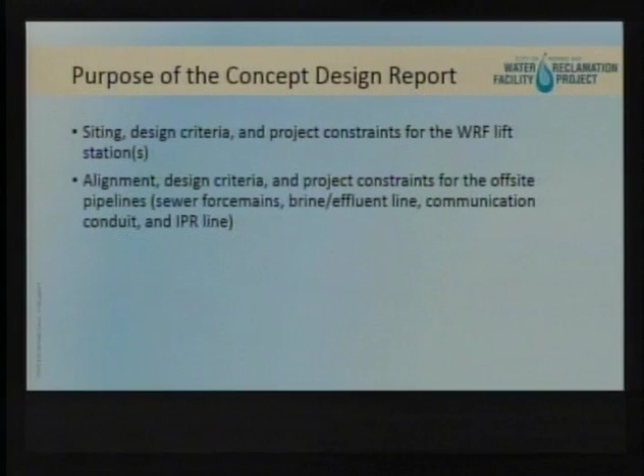We first brought the information in this concept design report to WRF-CAC on December 17th of last year. We then brought a very similar presentation to council in January. We were directed to come back to council in February to revisit the item, mainly so that council could take formal action on the selection of two critical items: the alignment and the configuration or number of pump stations. I'll go through that a little more here as we review the concept design report information.

Again, on January 22nd of this year we brought it to council. We were directed to come back to council again on February 13th. And now we're here at WRF-CAC, and this is June 4th. The plan is to bring this to council next week—a very similar presentation, overview again, and just formal receipt of the report. The final concept design report will be delivered in September 2019. The reason for that delay is essentially that the design engineer is planning to deliver the final of this report along with their 60% design submittal expected in September of this year.

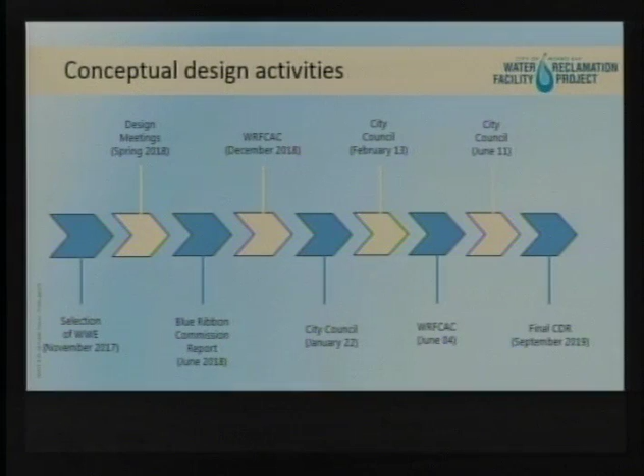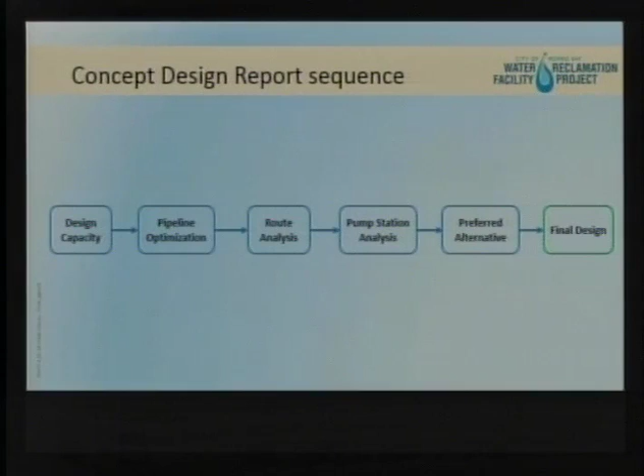On the design capacity, the design engineer looked at a number of sources of information to come up with the design flows for the pump stations and pipelines—really three main sources of data. There was facility master plan information from 2017. There's historical flow meter data, which the city has collected for a number of years. And then the One Water Plan, which included a detailed flow analysis performed by Villalobos and Associates back in 2016-2017 to inform the One Water Plan, and specifically the collection system master plan component of that project.

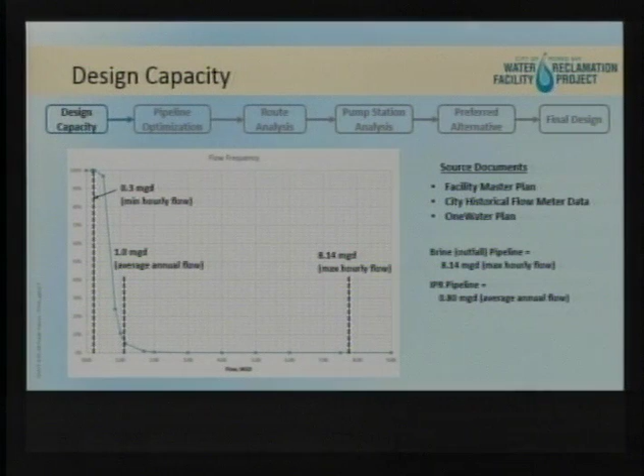The result was a determination that the Brine or Outfall pipeline should be sized for the max hourly flow capacity for the treatment plant, which is 8.14 MGD, and the IPR pipeline would be designed for 0.8 MGD. The main treatment plant itself would be designed for an annual average flow of 1 MGD. The way we got to that 0.8 MGD is you take the 1 MGD treated on average by the water reclamation facility, and once you pass that water through the reverse osmosis process at an 80% recovery rate, you take 80% of that 1 MGD—that's the water we have available to put into the ground, which is 0.8 MGD.

Then we looked at pipeline optimization. This was something considered during the preparation of the Blue Ribbon Commission report, and was also discussed at length in December, January, and February.

Previously there was the alternative of using 2 separate sewer force mains. Because of the nature of the flows the city's treatment plant will see, they range from hundreds of thousands of gallons per day during low dry weather flows, all the way up to 8.1 MGD anticipated for wet weather flows. So the proposal was to use 2 separate force mains, one smaller, one larger. The small one would be used during average dry weather conditions, and the larger one would be used during wet weather conditions in conjunction with the smaller, also giving the system some redundancy.

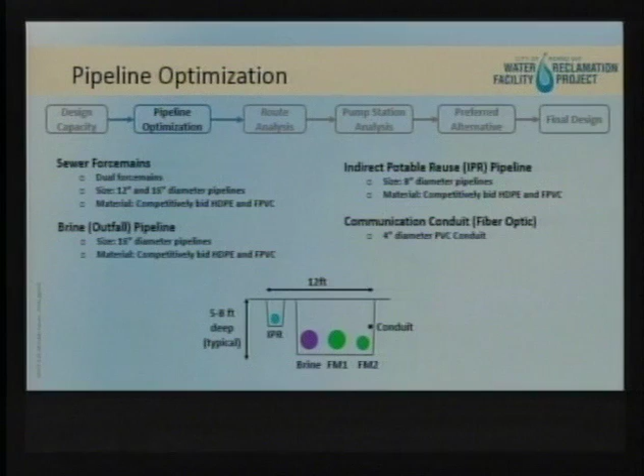The Brine Outfall pipeline was sized at 16-inch diameter, looking at a number of different materials. The IPR pipeline is envisioned to be an 8-inch diameter. We also looked at a communication conduit to provide fiber along the pipeline alignment to connect the different pump stations, that's a 4-inch diameter conduit.

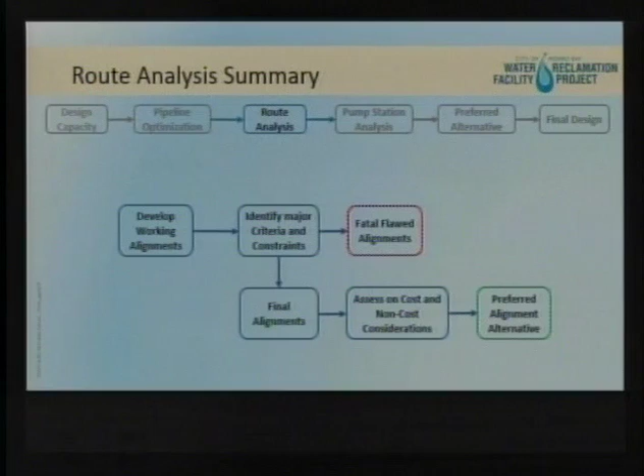A route analysis was performed. First, a number of different working alignments were identified. Then we went through the process of identifying the criteria by which those alignments would be evaluated, as well as some of the major constraints. Then we went through a fatal flaw analysis to figure out which of these alignments just wouldn't work, regardless of cost or other reasons—they were deemed non-viable. The ones deemed viable made the list of final alignments. Those were assessed using cost and non-cost factors, and we came up with the preferred alignment alternative.

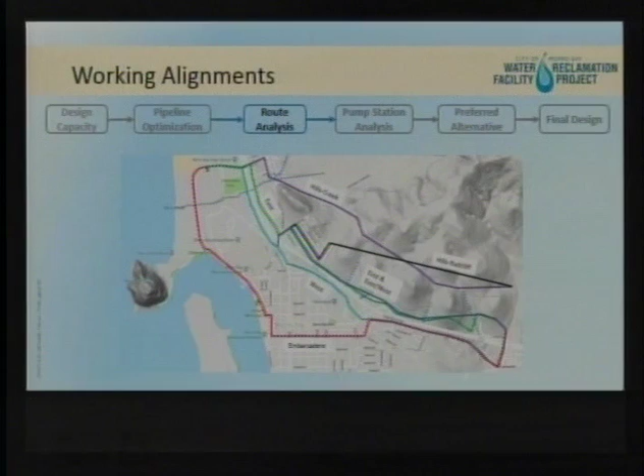This figure shows the 5 different alignments that were considered. There are 3 on the east of Highway 1, as well as 2 different alignments to the west of Highway 1, with the 2 west alignments being the ones that were not fatally flawed and went through detailed analysis—the Embarcadero alignment and what we deemed the west alignment, the one that runs in Main Street, the bike path, and Quintana.

Pump station analysis was performed. Originally we envisioned the system would operate with a single large pump station located near the city's existing corporation yard. Based on a review of flows and additional analysis, the dual pump station concept was identified. It had a lower capital cost than the single large pump station, and had other ancillary benefits, including the ability for the city to reuse existing infrastructure. So the determination was made to move forward with the dual pump station option.

As mentioned previously, the city is currently putting together an addendum to their final EIR. That final EIR addendum includes this pump station B, located near the intersection of Highway 1 and Main Street.

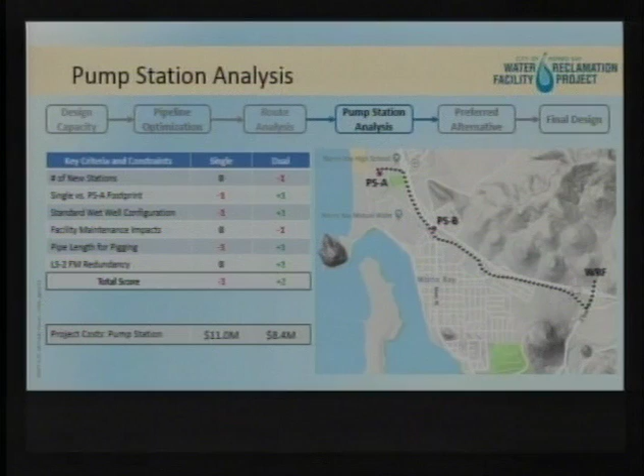This figure shows the preferred alignment with the 2 pump stations identified and the alignment as it currently exists. There are a couple of small changes in the alignment—the pipelines are no longer running through Lila Keiser Park based on input received from some concerned Native American groups.

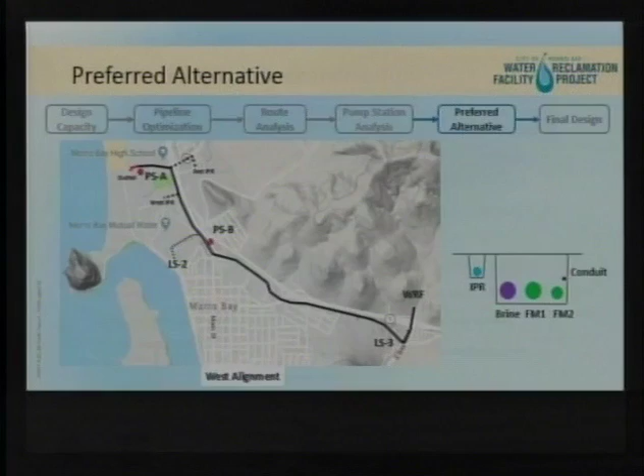One thing noted in the staff report that I want to highlight briefly is that this report was initially drafted in November 2018. We're now in May 2019, presenting the final draft. Very few changes have been made to that document. The one critical item to point out, which we've noted in the last several monthly status reports for the project, is that the schedule for this component of the program has been impacted by the city's ability to access a couple of properties critical to designing the pipeline, mainly as we move from 30% to 60% design.

A really important component of that is getting the survey completed, as well as the geotechnical investigations completed, and getting that information to inform the design. We've had some challenges accessing the PG&E and Vistra properties that we've now worked through. The surveying for both of those properties was completed last week.

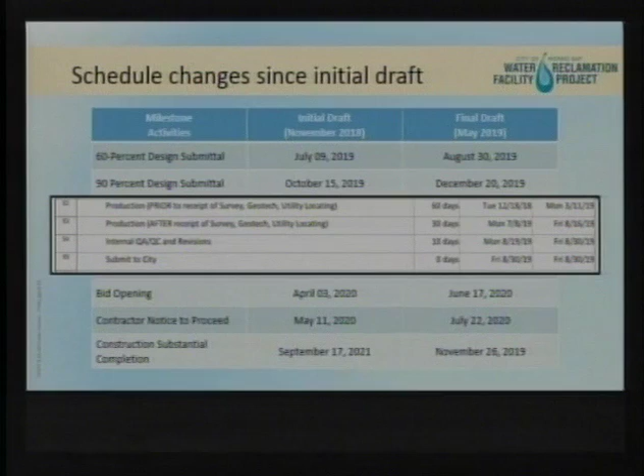We're currently working to get the geotechnical work done in June so that the project can progress. But this table identifies the slippage in the schedule by several months, kind of all the way down the line, and that's really being triggered by the 60% design submittal being pushed out several months.

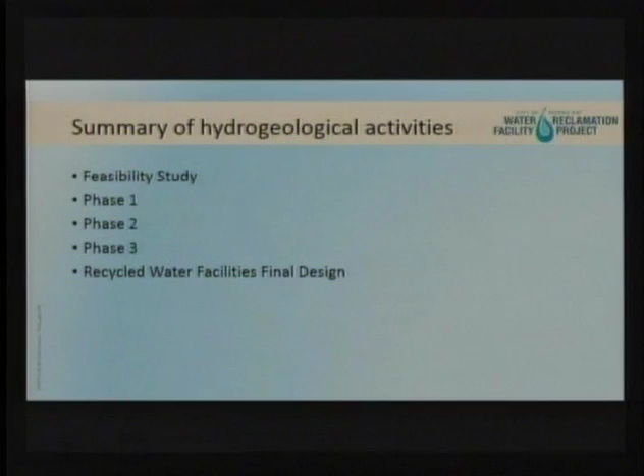So the feasibility study made a number of findings. One, that it's feasible for the aquifer to accept injection. Number 2, a minimum of 4 injection wells will be needed to inject the quantity of water we're looking at. We're looking at a range of capacity of that basin to accept the water.

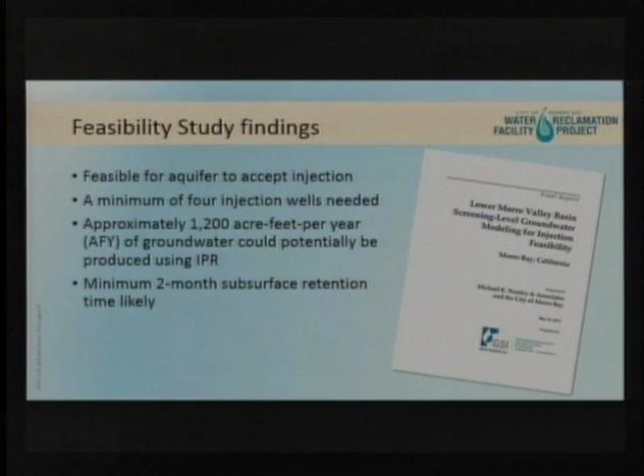The determination was made that approximately 1,200 acre-feet per year of groundwater could be produced and injected using IPR, and that the minimum 2-month subsurface retention time could likely be met at both the west injection location and the east injection location.

So the phase 1 scope of work, again what's covered here in the technical memorandum, was: first, to investigate pumping of the city's full permitted allotment of 581 acre-feet without injection; analysis of possible groundwater nitrate levels under different injection scenarios; and then analysis of potential changes in groundwater chemistry due to potential saltwater intrusion.

So really the first item, looking at the city's ability to pump its full allotment, that was really something that was spurred out of the development of the One Water Plan and looking at a number of different water supply options that the city has in front of it.

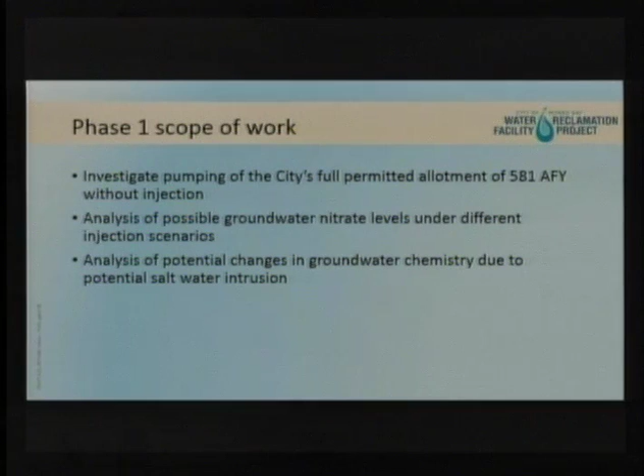Could the city pump this full 581 acre-foot allotment from the Morro groundwater basin and not induce any issues in terms of water quality? The next two really deal with what happens to the water after it's injected and extracted. Is there any follow-up treatment that would be required?

TDS, or total dissolved solids salinity, and nitrate data was available back to the early 1980s, and it's for different periods for different wells, but the oldest data goes back to the early 1980s.

GSI was building on their existing ModFlow model, the groundwater model they developed for the feasibility study. They have an add-in for ModPath, which essentially does particle tracking in the groundwater. So they take their existing model and layer in this additional capability with ModPath to do the particle tracking for constituents like nitrate and TDS.

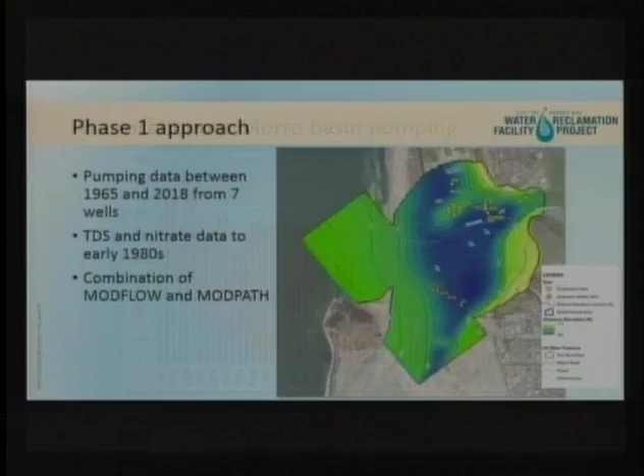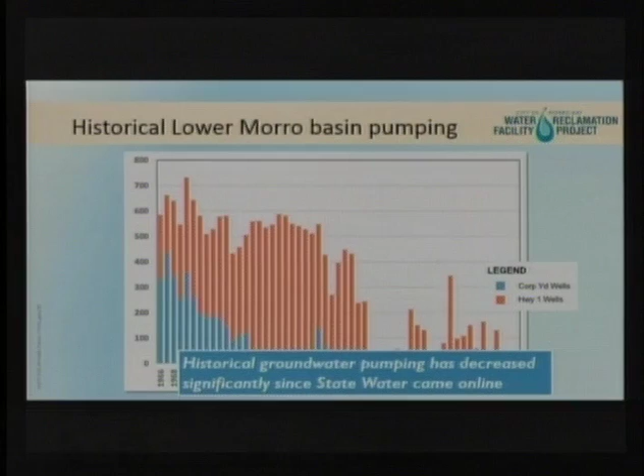So the first task was to look at the impacts of pumping on seawater intrusion. The city has a permit to extract 581 acre-feet per year from the Morro groundwater basin, and currently the city only extracts a fraction of that. The majority of the potable water comes from the state water project. The city does extract groundwater during periods of high demand in the summer or periods of outages for state water.

So we first asked ourselves: could the city decide to just start pumping the groundwater basin in the absence of state water, or if it wanted to more highly utilize its existing groundwater basin, what would happen under that scenario? The scenario was run with pumping of the full 581 acre-feet allocation, simulated over about 38 years starting from now. It identified that TDS concentrations over that time would get into the range of about 5,000 to 17,000 milligrams per liter.

TDS, or total dissolved solids, is not a primary drinking water MCL. It's what we term a secondary drinking water MCL, and the limit for that secondary MCL is 1,000 milligrams per liter. So what we're really trying to say here is that the city is at risk of pretty significant seawater intrusion if they were to increase their groundwater pumping. If the city decided right now to pump that 581 acre-feet from the Morro groundwater basin over a not-too-short period, they would start seeing seawater intrusion.

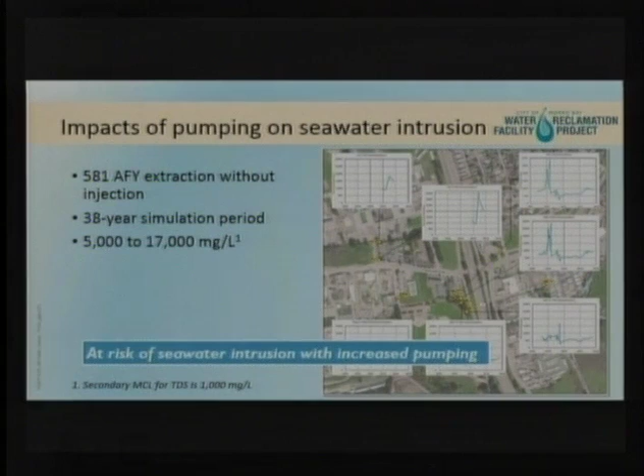So that was the first element of the phase one work.

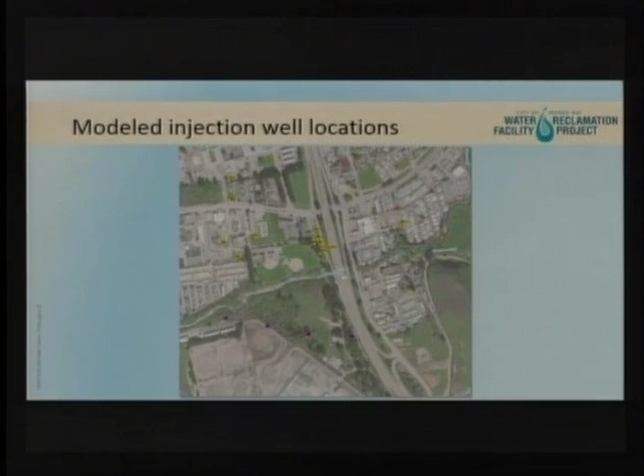The second and third elements of this work looked not just at extraction, but the combination of injection and extraction. As discussed earlier with the conveyance facilities project, we're looking at two different injection locations, and we're carrying both forward in the environmental document to give us the most flexibility for when we start final design of the injection wells.

So those are the two different injection locations. One is on the west side of Highway 1 - we've been calling it the west injection area, though GSI's report refers to it as the south side injection area. The other, by Silver City to the east, we term the east area, and in their report it's referred to as the Narrows area.

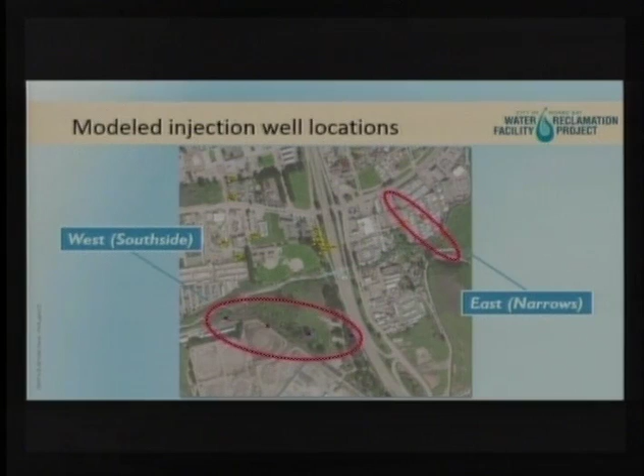So first we looked at the impacts of injection on nitrates, using historical nitrate data. The model was calibrated to that data, and you can see the red line represents the primary MCL for nitrates. Under a series of injection of about 825 acre-feet per year - the designed injection capacity of the new water reclamation facility - and extraction at the city's permitted capacity of 581 acre-feet, it was determined that the nitrate concentration in the groundwater would drop below the primary MCL.

That was really the big question we wanted to ask: what will happen with the nitrate concentration if we were to inject and extract? One thing you might ask is, if we're injecting 825 acre-feet into the ground, why are we only extracting 581 acre-feet? The reason the analysis was done this way - and we're continuing additional groundwater analysis - is that we wanted an even comparison with the non-injection option.

So we're extracting 581 acre-feet without any injection in that case - what happens if we extract 581 acre-feet with injection? That's why the decision was made to run the model at the 581 acre-feet extraction level. Now, we'll be running a number of different model runs in the phase 2 work, looking at different extraction volumes and injection volumes.

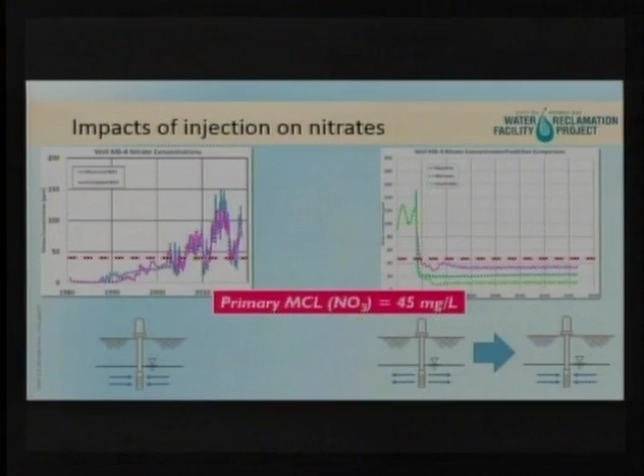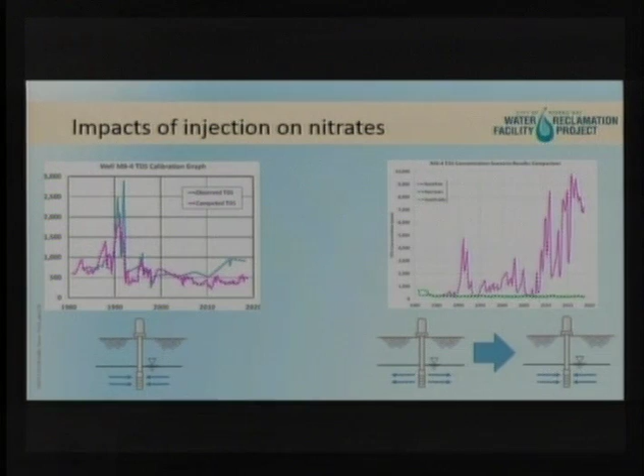So the next question is, what are the impacts of injection on salinity? I apologize, the heading here is incorrect, but the model was run with no injection to look at TDS concentrations. This orange line shows the secondary drinking water MCL for TDS. In this scenario, both at the west and east injection locations, with injection and extraction, the TDS concentrations stay below the secondary drinking water MCL of 1,000 milligrams per liter.

That should not say 45 milligrams per liter - the orange line is correct, the callout is not.

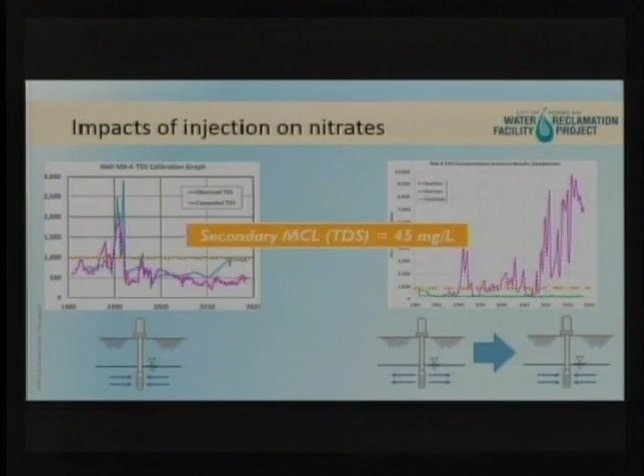So that's essentially the takeaway from the phase 1 work - it was very focused on looking at the impacts of these different constituents in the groundwater under different scenarios. We're currently working on the phase 2 work as we speak, which builds on some of the information we learned in phase 1. We still have a lot of work to do, and GSI is currently working on a number of different items.

So phase 2, what we plan to complete over the rest of this calendar year is really looking at design and permitting of the test wells. We're currently working on that. Really evaluating the two potential injection well locations and figuring out what is the preferred area for injection and testing. Securing the permits for the injection testing wells, conducting the actual pilot injection testing, and doing any tracer studies or anything that we may need to do.

As I mentioned, we're going to be continually updating and getting better information into the groundwater model. And then it really leads us to the big payoff as it pertains to the permitting aspect of the project with DDW, which is showing that the travel time can be met with the travel time analysis and a clogging analysis of the injection wells. And then continuing to perform seawater intrusion monitoring and groundwater level monitoring.

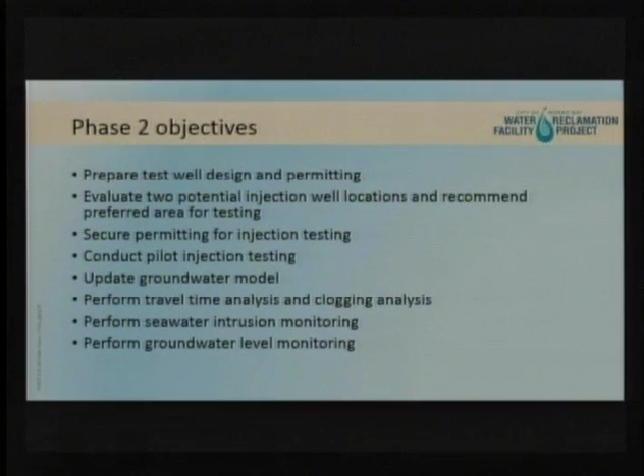So what are we currently working on right now? What is the team currently working on? Phase 2, status update. What are we currently doing?

We've been working on the evaluation of the injection location, specifically when GSI started and prepared their proposal and negotiated their scope of work. There were some concerns about the geology in the Narrows area, or the east injection area, and the ability of that area to accept the injection water.

So as a way to help identify if that was going to be a possibility, some cone penetration tests were done in the east area within the last couple of months. That's come back favorable in terms of the ability to inject in the east area. So that work has been completed and allows us to continue to move forward with analysis of the east area.

That was kind of a pass-fail test. It's a fairly inexpensive geotechnical investigation that can be done, and so that work was done, and it allowed us to say, okay, this makes sense, let's proceed down this path on the east area.

We're now currently preparing the test well design and permitting in the east area. We're preparing to install a piezometer on Errol Street. We're currently looking at that being done as early as the 13th of this month.

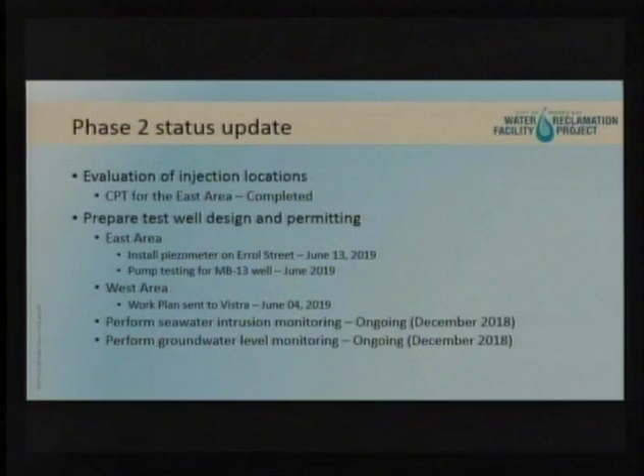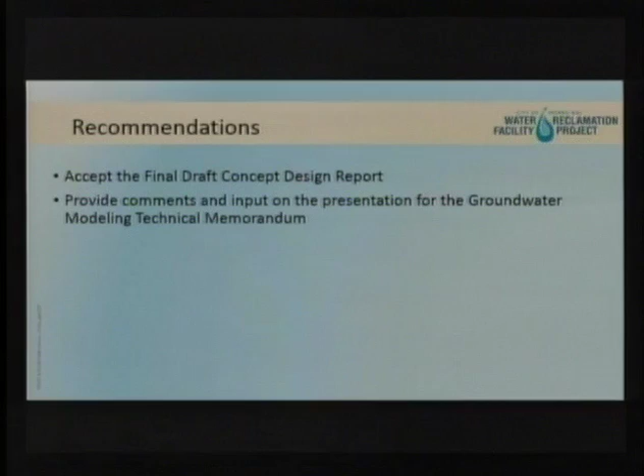Again, that's an overview of the phase 1 work and a preview of what we're currently doing in phase 2. What we're asking for you tonight is to again accept the final draft concept design report and then provide comments on the presentation that we just presented on the phase 1 work.

All right, thanks, Eric. Does the committee have any questions? I'll start with you, Steve.

Okay. I feel somewhat remiss, Eric, because, like I said, I was reading this off an iPhone. I was out of town. And when I read the actual staff report, it talked about only accepting the final draft concept for the waterworks engineer, and then it says to provide comments and inputs. So I kind of pushed all my energies into looking at the waterworks engineering report. While I can make some comments off what I saw today, I'm not quite sure I feel in a position to accept it since I really haven't had the opportunity to go through it at any length.

Is it only getting approved at each phase, or are you looking for something at the end after the other phases are done? I'm not sure where you're going with city council after this - are they also going to try and accept this final report? I believe we're just going to be looking for the council to receive it, review it, and provide any comments. I don't know if there's anything in that report that needs to be formally accepted by council. So it's really just a continuum - I read one that sounded like you're looking for an approval, and another that felt like it was purely comments.